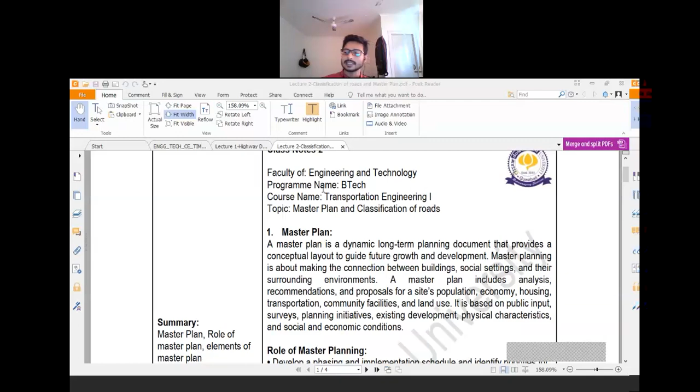It is based on public input. Different surveys are associated with the master plan and planning initiative, existing development, physical characteristics of the area, social and economic conditions. Next is the role of master planning - why it is important.

Master planning is useful to develop a phasing and implementation schedule and identify priorities of action. As said earlier, you first plan for 25 years, then based on phasing or implementation, you divide this master plan into short-term planning. Short-term planning is generally 5 years. So master plan is 25 years planning and short-term planning is 5 years planning, divided based on the priority of your work.

Master planning acts as a framework for regeneration and attracts private sector investment, then conceptualizes and shapes the three-dimensional urban environment. This means you need to look for the development, the environmental condition, and the surrounding condition.

It also defines public, semi-private, and private spaces and public amenities. You need to define where different portions of your city development will be situated, determine the mix of use and their physical relationship, engage the local community, and act as a builder of consensus.

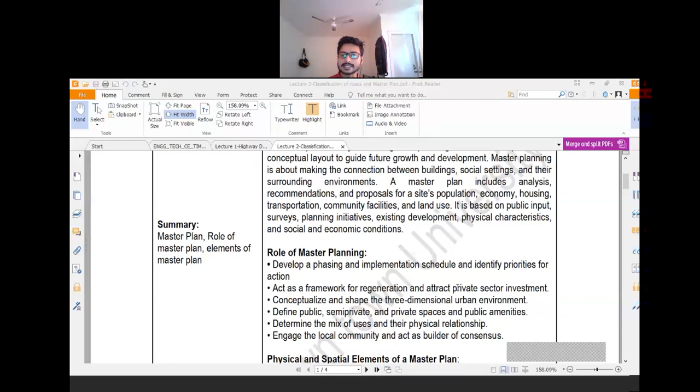Suppose some business area is there and you have established some market area. In the market area, there will be different types of business models, some bookstores, some food stores, etc. So you need to plan where these food stores will be, where these bookstores will be, where this vegetable market will be. All these things are taken care of by the master planning.

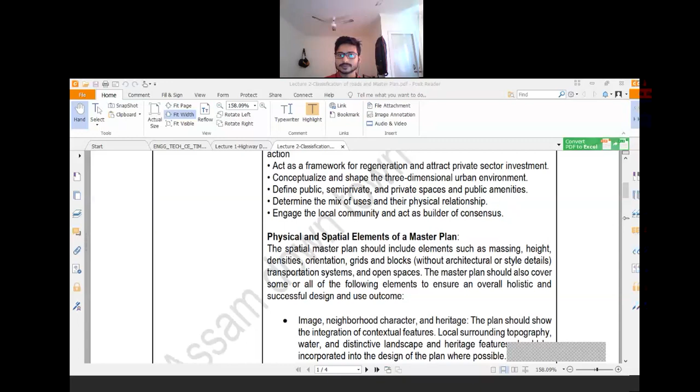Now, elements of the master plan. The master plan should include different elements such as massing, height, densities, orientation, grid, and blocks. These are different patterns of the master plan, and we always need to provide open spaces in the city area, generally for meetings or recreational activities.

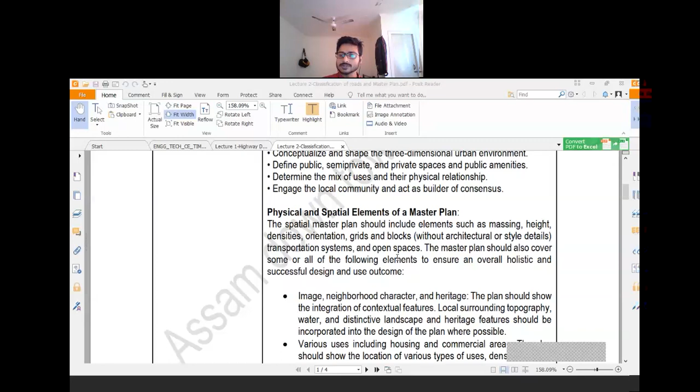Then the master plan should also cover some or all of the following elements. Let us discuss about all these things. First one is image, neighborhood character, and heritage.

The plan should show the integration of contextual features, local surrounding topography, water, and distinctive landscape and heritage features should be incorporated into the design of the plan where possible. Suppose in the area you are assigned to plan, some heritage building or some important landscape is there. It is always advisable to keep intact all these heritage things or important landscape characteristics.

Suppose one heritage building is there, in that case you always have to plan in such a way that the heritage portion gets highlighted in your master plan. You cannot demolish these things. If you demolish that heritage place, or some important landscape, the total area will be devoid of its original characteristic.

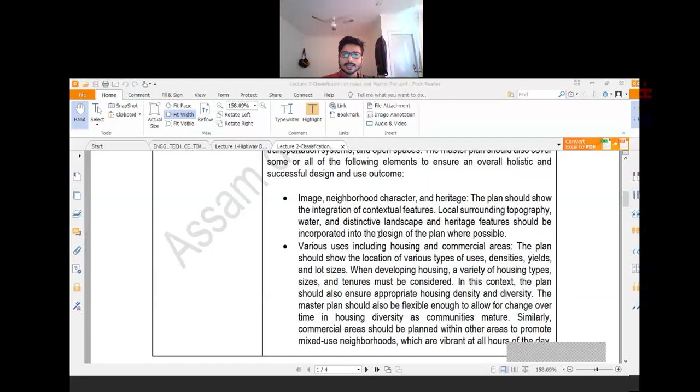Next one is various uses including housing and commercial areas. The plan should show the location of various types of uses, densities, yields and lot size. Various types of uses means which portion of your city area would be used for which activity. Some areas may be used for residential purpose, some for recreational purpose, some for industrial purpose, etc. You need to look for it.

Now, when developing housing, a variety of housing types, sizes, and tenures must be considered. That is the thing I discussed, that if there are different types of buildings, it may be 1 BHK, 2 BHK. You need to consider all these factors accordingly.

The plan should also ensure appropriate housing density and diversity. The master plan should also be flexible enough to allow for change over time in housing diversity as communities mature. This is very important, because your master plan is basically a 25-year plan. You have designed some area keeping in mind this 25-year plan, meaning in 25 years there may be chances of future expansion, population becoming more mature, or population growth. So your master plan should be flexible enough that at any time you can incorporate some important feature.

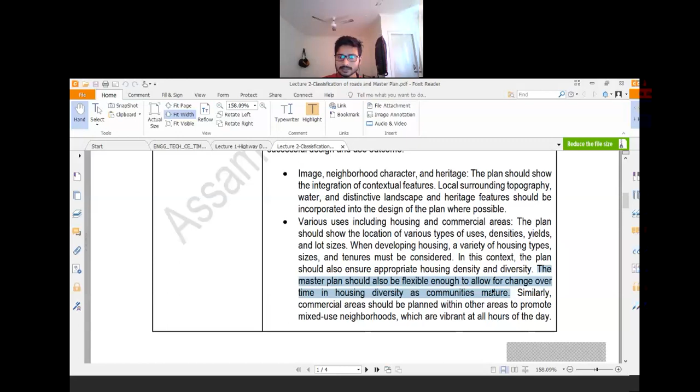Commercial areas, this is discussed already. Now, entertainment and retail land uses should also be integrated in the master plan. There should be some places where recreational activities are being promoted.

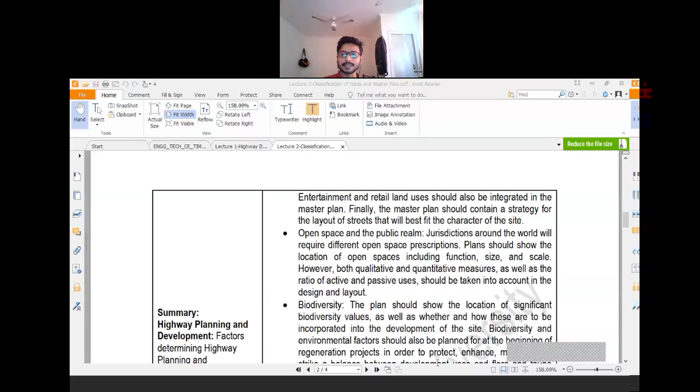Then open space and the public realm. Jurisdiction around the world will require different open space prescriptions. Why is open space required? It is required because of some recreational activities, if there are some meetings, or it is required as a playground, etc. So for all these reasons, some open space is always required.

Plans should show the location of open spaces including function, size and scale. There may be different types of open spaces, and these would be designated as per their requirement. Some of the open spaces may be used as a meeting place, some may be used as a playground, and some may be used as a park.

However, both qualitative and quantitative measures, as well as the ratio of active and passive uses, should be taken into account. Qualitative means what is the quality of that area, and quantitative means what are the numbers of that area. So that should be measured accordingly.

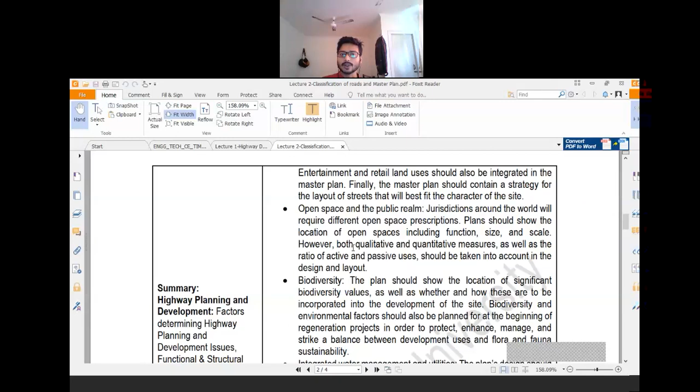Now our next point is biodiversity. The plan should show the location of significant biodiversity values as well as whether and how these are to be incorporated into the development of the site.

As I said, open spaces are required. In some of the open spaces, you can design for a biodiversity area, some area where generally there would be a biodiversity park or vegetation park, etc. Along this some path would be there, so all the people can go over there and get relaxed from the busy nature of the city.

Biodiversity and environmental factors should also be planned for at the beginning of the regeneration project in order to protect, enhance, manage, and strike a balance between development use, flora, and fauna sustainability.

So basically, this biodiversity is... hello, hello.

Basically, this biodiversity is required to make the city more sustainable. In the city area, it will always be very much busy with different road traffic, different business areas, and industry areas. So from this industry area, from this building area, from this business area, much more pollutant will be generated. So if there is some biodiversity, some vegetation over there, it will help absorb all these pollutants and make your city clean and sustainable.

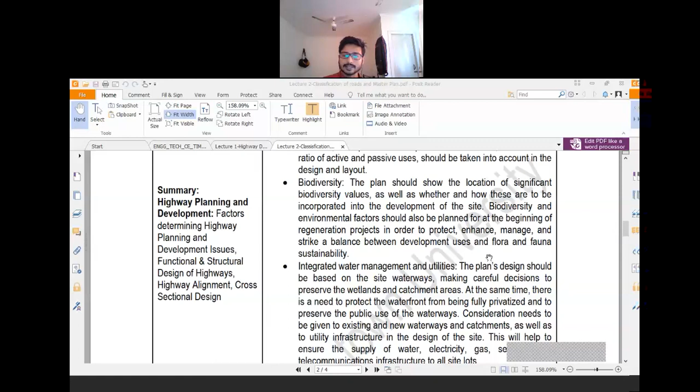Then integrated water management and utilities. This is very much important for any city to sustain. Water management is very much important, because water is required for each and every household. So whenever you are designing or going for the master plan, you need to look for the different water sources which would be useful for the city, because the city will require a huge amount of water for consumption purposes, industrial purposes, and other purposes.

The plan design should be based on the site waterways, making careful decisions to preserve the wetlands and catchment area. This water management is very much important, and that's why important cities around us are generally constructed beside some river. At the same time, there is a need to protect the waterfront from being fully privatized and to preserve the public use of the waterways. Suppose in your area or city, some wetlands, ponds, or lakes are there.

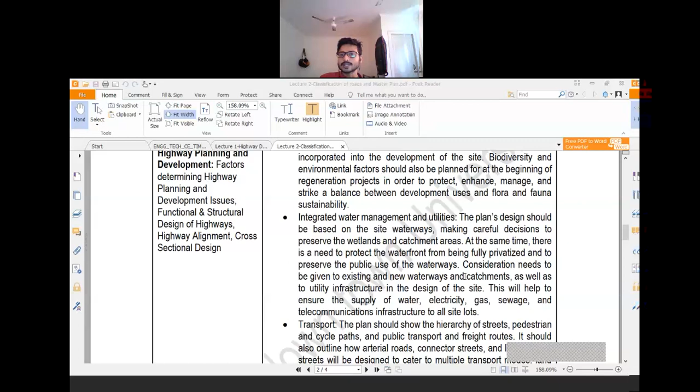Next thing is transport, and this is basically our main concern. You need to design the transport facilities as per the different land use pattern. Suppose in a residential area, if the population density is not too high, the road width can be narrower. Now for industrial or business areas, there would be much more population and much more traffic, so the width of the road should be higher.

Now the plan should show the hierarchy of street, pedestrian and cycle paths if possible. Hierarchy of roads means in urban roads there are different divisions, like arterial, sub-arterial, major district road, minor district road, etc.

It should also outline how arterial roads, connector streets, and local access streets will be designed to cater to multiple transport modes. Generally for the city, roads are classified as arterial, sub-arterial, collector or connector streets, and local access. Local access roads go up to the residence, then meet with collector streets, where the width of the collector street is more than the local access road. Then these connector streets meet with the arterial or sub-arterial road.

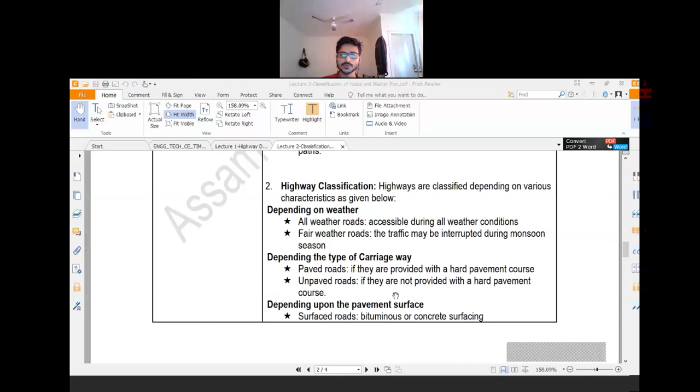They are not provided with any hard pavement course. Now the next one is depending upon the pavement surface.

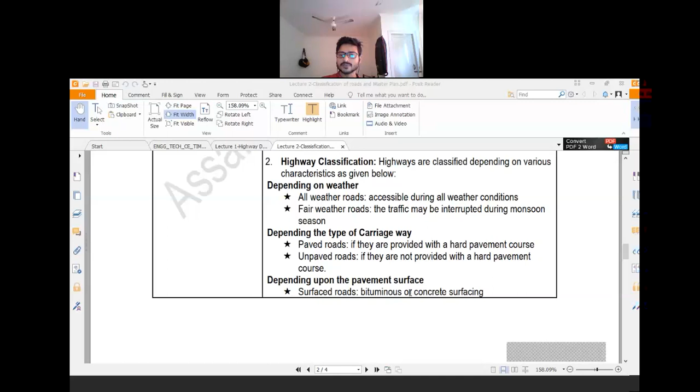This category is basically the expansion of paved roads. In paved roads, there are two types. One is based on surface condition, so there may be surfaced roads, and these may have bituminous or concrete surfacing. Bituminous means the black sticky portion you have generally seen over the road. Concrete surfacing, you know what concrete is. In some cases, concrete surfacing is also provided based on the traffic condition.

Another one is unsurfaced road. In the unsurfaced road, you will not provide any type of bitumen surfacing or cement concrete surfacing. That would be only waterbound macadam.

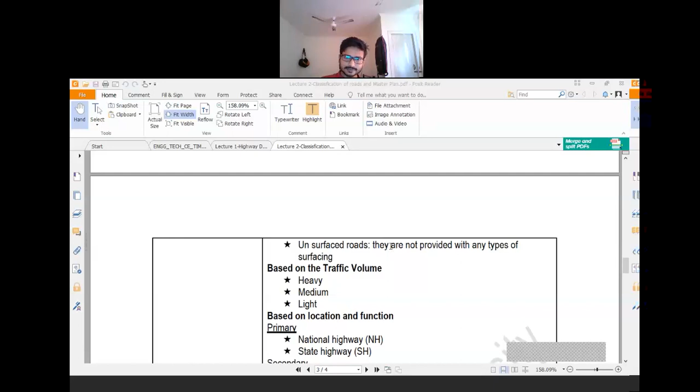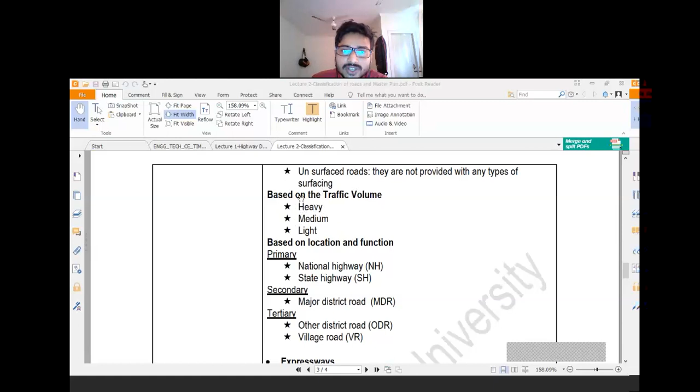Now coming to the next portion, based on traffic volume. Your road may have a heavy traffic condition, a medium traffic condition, or a light traffic condition. So based on the traffic condition, you need to design your road.

Then based on location and function, there are different categories. In the primary category, you will get national highway and state highway. Then you will get major district road, other district road, and village road. So let us discuss about all these things.

So there are two terms which you need to understand: one is accessibility and another is mobility. Accessibility means how easily you can access the road, and mobility means how much speed you can attain over there. Is it clear what is accessibility and what is mobility?

So in that case, we can proceed further. Is it clear what is accessibility and what is mobility?

Okay, once again, accessibility means how easily you can access the road. Let me give one example. Suppose one road is there which passes in front of your home. Whenever you are getting out of your home, you can easily access that particular road. So this is accessibility, how easily you can get to the road. Now consider this condition.

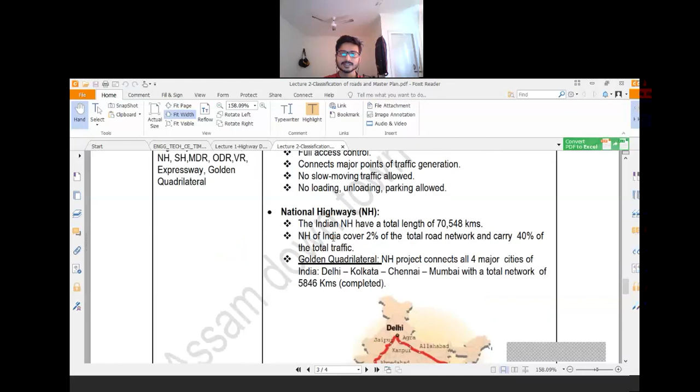Now another thing, national highway—we have already discussed about all these properties. Another important project is the golden quadrilateral. This is a national highway project connecting all four important cities, that is Delhi, Mumbai, Chennai, and Kolkata. These are the metro cities, and this plan connects all these cities so that business activities will be easy, because if road construction or connectivity is high, the chances of development would be more, as you can transport goods and other things more easily from one place to another. Already the Delhi-Kolkata-Chennai-Mumbai road, 5,846 kilometers, has been completed. Some portion is left, so it will be completed within a few years.

Now coming to the description of these different roads—these things I have already discussed. State highway roads are the arterial roads of the state, meaning main roads of the state connecting with the national highway. So as I discussed, this state highway will connect with the national highway, district headquarters, and important cities within a state. Some important district headquarters will be connected with the state highway, and that state highway will be connected with the national highway.

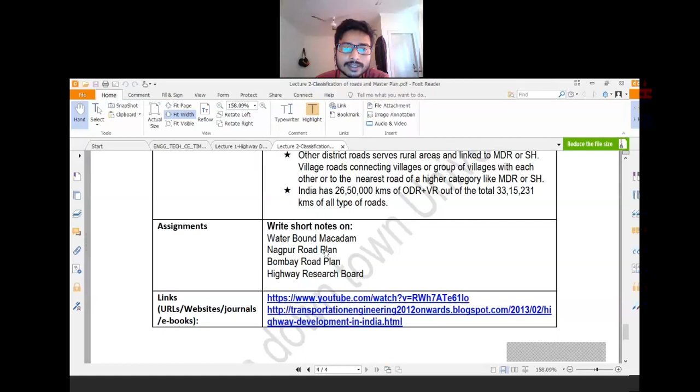So here are some links, you just have to go over there. In this link, some topics are discussed like waterbound macadam, Nagpur road plan, Bombay road plan, Highway Research Board, etc. These are all theoretical things and there is nothing much to discuss, so I'm not covering this here. You can look at the link and go through all this material.